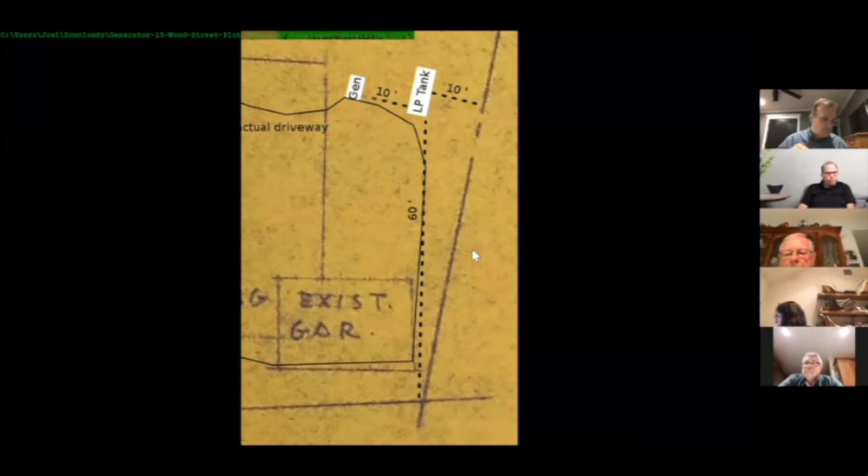Having a little bit of trouble switching between photos while it's shared. I'm okay, not sure if you need to. Let me find the right one and I'll share it again, the one I was talking about.

We're very close, we talk all the time. 17 Wood Street looks like it's completely far away, but in fact the driveway at one point snakes by, and that's why I measured whether they'll be able to see it from the driveway. I just don't see how they'll be able to see it even - look, they're half a mile away. When they're home, of course they're not going to see it.

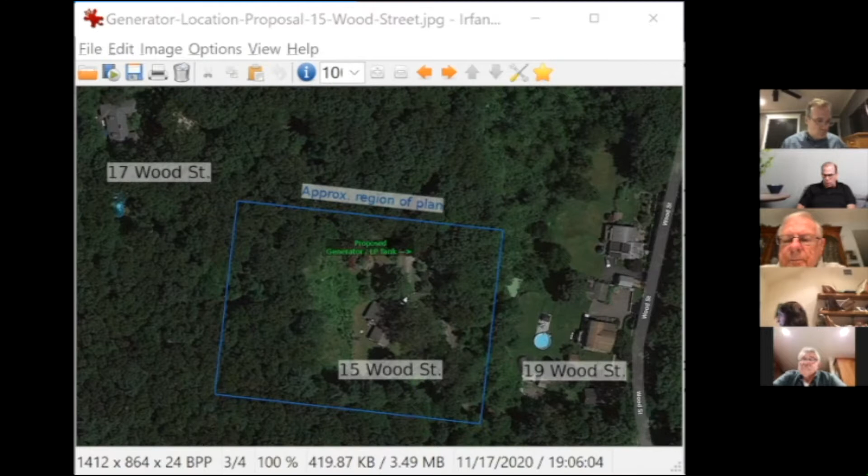And just in terms of location, can you see the new shot? Yes. This is sort of on my property, the generator and the LP tank. It's a little bit off, I didn't get it exactly right. The driveway is not just the black part - you can see there were leaves when I took this photo. The generator is actually a little bit further to the left.

But the point is that's the radius that can be refueled during the winter with the refueling truck. The reason I can't put it way further to the left next to the house is that it exceeds the range of the hose for refilling the LP tank, unless I'm successfully able to clear much more of the driveway than I normally am during the winter.

Now I do have a question for you. If I remember correctly, because I used to be in that neck of the woods, your driveway is relatively steep slope? Yeah, if you look at the part on the screen, you can see there's a part before it forks. The fork is a fairly steep slope, yeah.

Okay, but where the turn is, does it still have some grade to it, up to where the cars park? The turn, it does have some grade, it's not as steep as the other part. It's currently not blacktopped - I forget the rationale for that, but the driveway person, when I bought the house in foreclosure, did a lot of work on it.

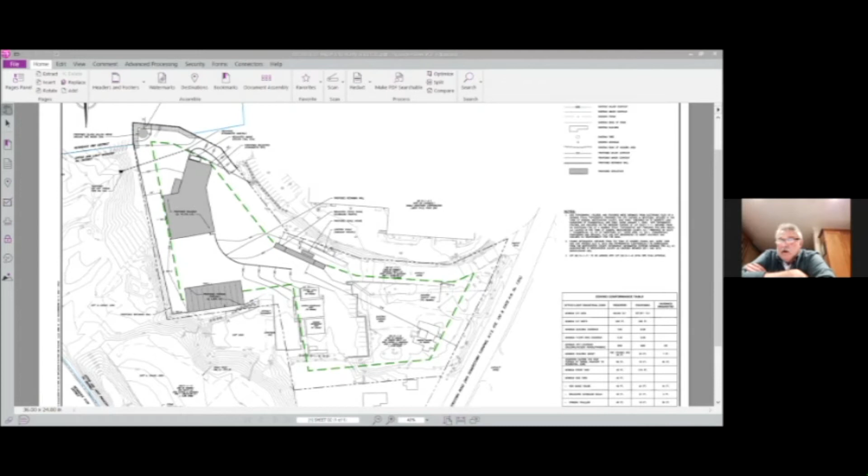Now, I may be asking this prematurely — with the new configuration of the scales, I've been there numerous times, and depending on the time of day, there's a line all the way out to Route 100. Is this going to alleviate some of that traffic, in the sense of two scales, or if I read it correctly, can you have two scales? Because one I understood was for commercial purposes for yourselves, and the other was for the general public and the normal carters coming in and out. Is there going to be two scales, so this way people can get off of Route 100 easier?

There are two scales. There will be two scales. This existing scale, if you can see my cursor, will be the inbound scale, so all vehicles coming in will cross this inbound. This scale will be the outbound scale. There's an existing scale approximately right here that's outbound, but we're also going to be installing a scale in the tunnel here, where the tractor trailers will be weighed as they're loaded.

So when they're being loaded, they'll be weighed. When they meet their weight, they'll be taken out and either parked in the pavilion or taken off site to their destination, whether it's a disposal or recycling facility. So they won't be crossing the scale again — that should help alleviate some of the traffic you've experienced.

Now, I'll say I'm a little confused, because right now there are two separate scales existing. Correct — one was for their own use, and one for the general public and the carters. I believe they're both scales today. As with the plan we have, one scale is for inbound and the other for outbound. So that's not the way they've ever been used, right? Anytime I've been there, it's the same scale, inbound and outbound, rotating one car inbound, one car outbound — that's what creates the backup Arnie's mentioning.

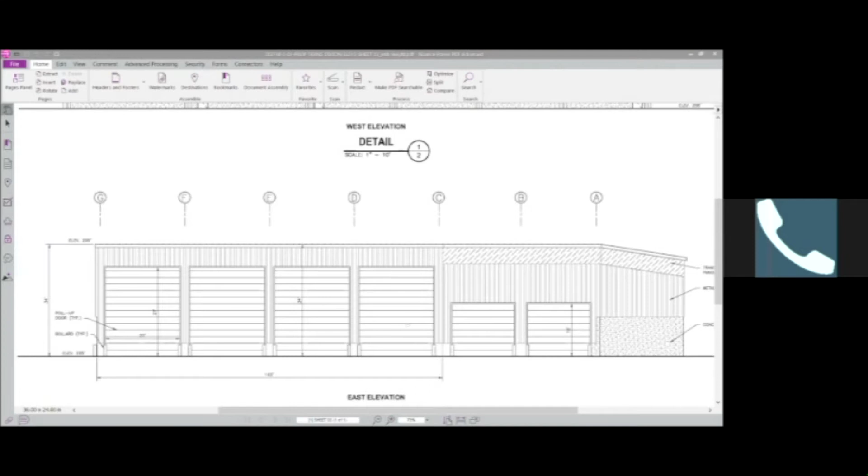Okay, so this is the front of the transfer station. Four large doors for commercial vehicles, and two smaller doors on the east end, on the part of the building that juts off at an angle, will be for customers, mom and pops. So we have a roof elevation in the front of the building at 299 feet above sea level.

The ground surface there is 265, hence the 34-foot elevation. But in reading your code multiple times today, it talks about ground surface elevations, and it wasn't quite clear if it was the average ground surface, the mean ground surface around the entire building, or the highest wall it talks about.

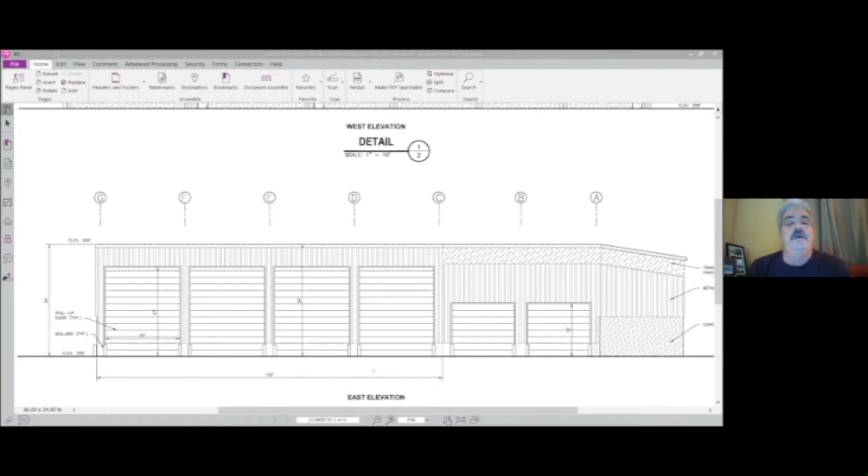So the highest wall is on the south side of the building, which faces the parking pavilion. We've got a mean roof elevation with a 4% slope — the high point of the roof is in the front and it slopes towards the back. So we have a mean roof elevation of 297 feet. The ground surface on this side and around the back of the building is 258 feet. That would give us a roof height at the mean of 39 feet, so our variance request would have to be for 9 feet.

So then the other thing we looked at was the mean ground surface. The mean ground surface elevation around the entire building is right around 260 feet. So if you look at that, we're looking at a variance of about 7 feet, for 297 to 260. So I think what we're looking for on a height elevation is, for the highest wall, a 9-foot variance. Apologize for not getting that straight a couple weeks ago when we made the submittal, but we want to get it right before we move forward.

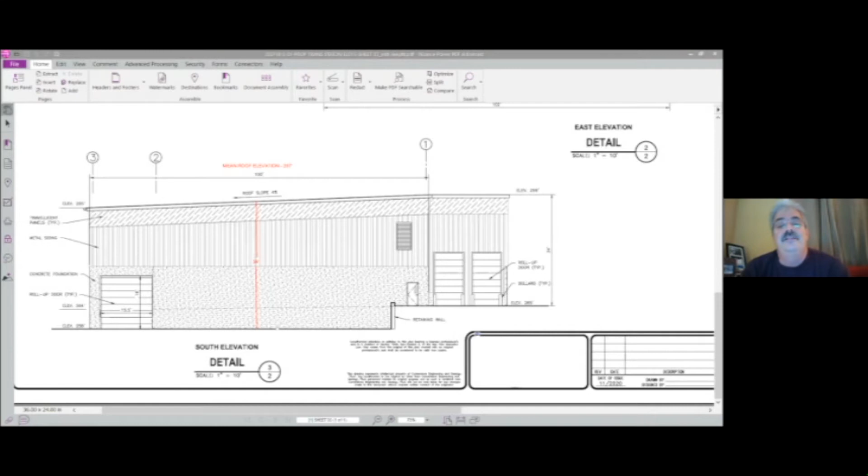Tom, what is your opinion on what height variance should be requested here based on the various elevations around the building? I would say take the mean height of the average grade around the entire perimeter of the building, not the highest point of the roof. Okay, so where's that going to put us as far as the variance they should be requesting here? About 7 feet, right?

I do have a question on the elevation. I'm looking at the proposed transfer station elevation page, sheet 3. At the highest point, the ground elevation is 258. The applicant mentioned a different height. The elevation of the ground surface at the front of the building on the east side is 265 feet. The ground surface elevation on the south and west sides is 258 feet. Okay, that's the side I'm looking at. I thought I heard a different number. Never mind, that's fine.

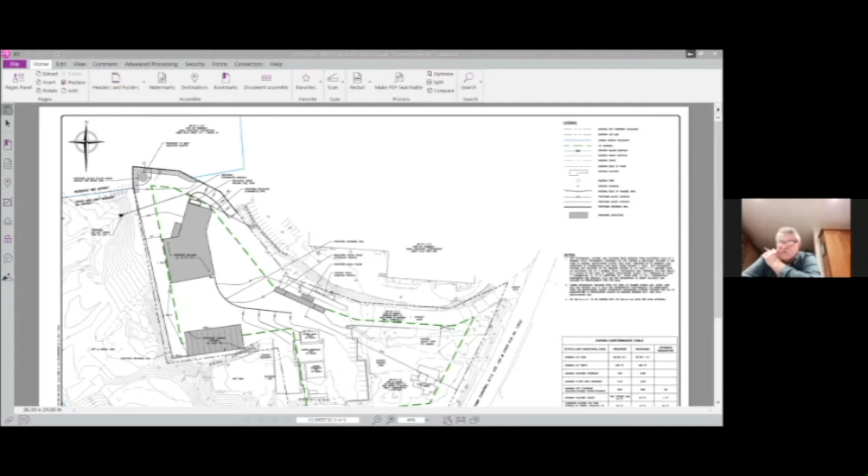If I may interrupt for a second, what is the water tank used for? That will be for fire suppression. Yeah, I did notice that tank, if I'm reading it right, that says 50,000 gallons. That's a pretty big tank. It is a big tank, but based on the size of the building and the material handled in it, that's what the building code requires.

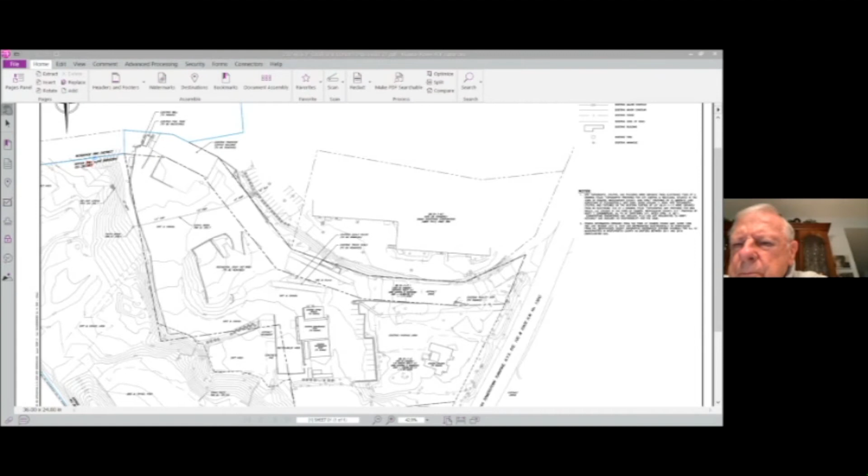Okay. So here, can you see the screen now? Yep. So this is the existing conditions, this is what's there now. Here's the two scales, here's the entrance coming in. This is the existing transfer building - its back wall is literally on the property line.

This is the other entrance in the back. This is the entrance in the front that I mentioned. The trailers are parked right here. It's open air, but it's a containment structure. There's a leachate collection, so any water that falls on this area or gets into any of these loaded trailers is collected and stored in a double-walled underground tank and pumped out as needed.

So there's already activities literally on the property line, and what we're asking for is a variance from the buffer. We will put a 10-foot buffer and plant it with evergreens and the like to help as a barrier. But there's just no way to move 50 feet off and then have the setback from that.

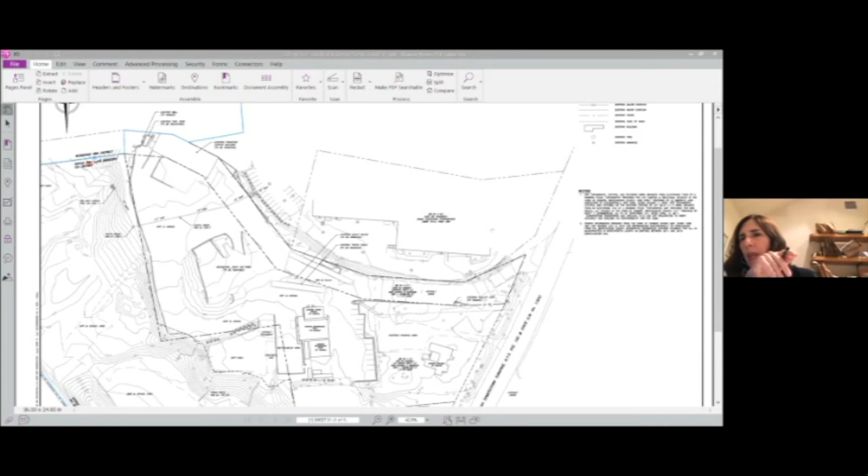No, so I didn't - let me just clarify. One, they're aware of it, and my understanding is they don't have any objection. But just so you know, right now our enclosure is on their line. So now we've actually created a buffer, and we'll put trees, and we will confer with them about the trees as well. But there'll be more of a buffer for them than they currently have on their property. That's great, and all I was asking for was a letter saying no objection.

Okay, we'll speak to them.

Question in regard to the tank in the northwest corner: how tall is that water tank? I'm trying to understand the size of the tank. I think it's about 20 feet tall.

Okay. And do you know what the diameter is of the tank? Not off the top of my head. Okay, this is the scale, so.

It looks like it's 10 feet wide. Yeah, about that, I guess. Yeah, up in your upper top corner. Yep, proposed 10 feet wide, if I'm reading it correctly. I don't think that's it.

Or is that the buffer? Oh, I'm sorry, it's a buffer. 10-foot buffer, take that back. Yep, 10-foot buffer. So the diameter is more than 10 feet. Probably 20, by 20.

It's 12 feet, it says. So that 12 feet is, the tank would be 12 feet from the property line, 2 feet from the buffer. That's why I'm saying maybe it's 20 feet wide tank and 20 feet high. It's about a 20 by 20 tank, give or take.

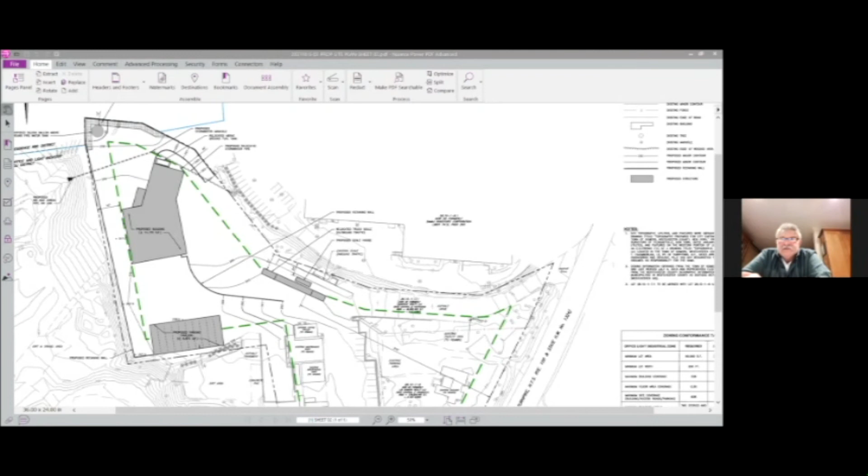Well, I think that's it, unless there's more questions. Yeah, okay, with the drainage, what are you gonna be doing for retention ponds? So there's an existing massive retention pond down here on lot 11 where stormwater is already directed, and what we're going to do is improve it.

The stormwater from the adjacent property upstream, Majestic, comes out at there's a head wall here and a pipe, and then another head wall right here. It's piped basically across here, I think it turns a little bit, and then it comes basically to the same area and discharges to this area on lot 11, which is a couple of isolated wetlands, and they end up working their way draining towards Plum Brook.

We are proposing to relocate that line around the building rather than have it underneath the building, and have it discharged at the same location. The stormwater from the site will all be sent towards this corner over here, and there's existing riprap swales that will probably need some improvement. But we're planning on using them, and the system hasn't been designed completely yet, but we'll probably have some sort of a small wide basin/swale across here to bring this stormwater this way.

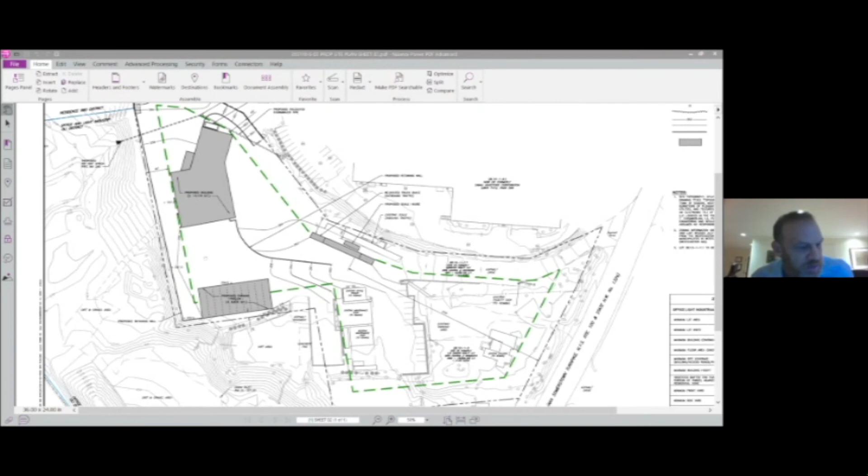And I would hate to just put more blacktop down if we didn't have to. I don't see why you can't just use a permeable paver. I don't see any reason. I don't think there's a big cost difference, and I don't understand it.

I believe they'd still be seeking the variance though, because our code defines site coverage in 170-3 as off-street parking and loading facilities, including access drives, whether paved or unpaved.

Yeah. Okay. And that was a question I had for you, Tom, whether gravel or pervious pavers or anything make a difference on site coverage. So it will not.

All right, 170, what was the site, Tom? It's 170-3 definitions, site coverage, and it's synonymous with lot coverage. So regardless of the surface, the variance would be the same.

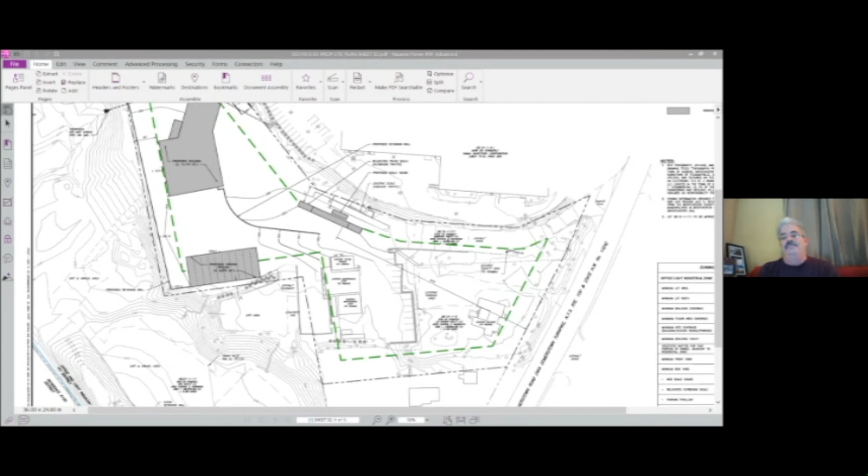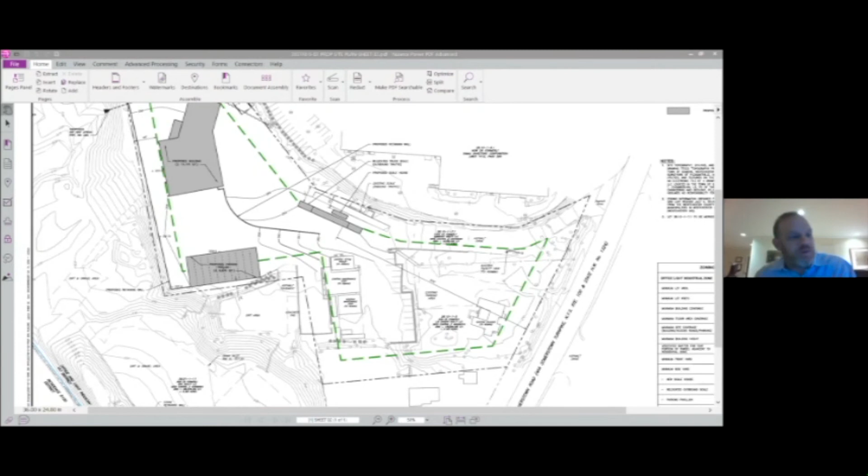Oh, you're saying with no change, you need the 9% variance. Correct, correct. But I think your suggestion is a good one, and I think we're willing to consider permeable pavers. So as we move to site plan, we'll incorporate that. That would solve my issues.

Thank you. One thing I'm looking at also is you do have a plan for proposed vehicle movement. Maybe you could put that up on screen for a minute? I can. Yep, let me get that.

Where is it? It seems to be color coded, with the red being the larger tractor trailers, and blue and green being residential vehicles and smaller commercial vehicles. Is that what we were talking about here?

I think so. I need to, yeah, sorry, you need to see it. I know, these are quite involved plans. Going through them, it took me some time to figure out what's going on here. Yeah, I didn't have that open, so I had to open it up.

Yeah, I think that was a plan that the planning board wanted us to include to show the movement of the vehicles.

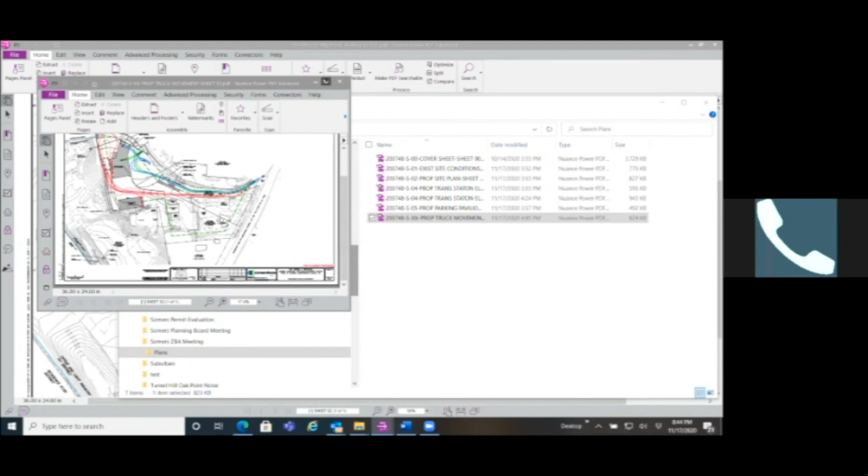Got it, but now, for whatever reason... and there you go, that's it. Okay, that was a fight.

There we go. So the red is the trailers, and this is what's called the tunnel. It's in the back of the transfer station, at a lower elevation than the tipping floor, which is up here. This shows that the trailers can pull back in, make this turn, and get into the building. That's why we need to use all this space, because they wouldn't be able to make that turn.

And then where do they exit the building? They exit right here. It's not shown, but they would come out here and either park the trailer and unhook it if it's just a yard horse, or if it's a tractor taking the trailer away, they'd just pull straight out and go.

And how do they get to the scale? They don't need to. There'll be a scale in the tunnel, so they'll be weighed there, and they have a tare weight for all their trailers. So they weigh them there, get the weight, and off they go. They don't have to go back across the scale.

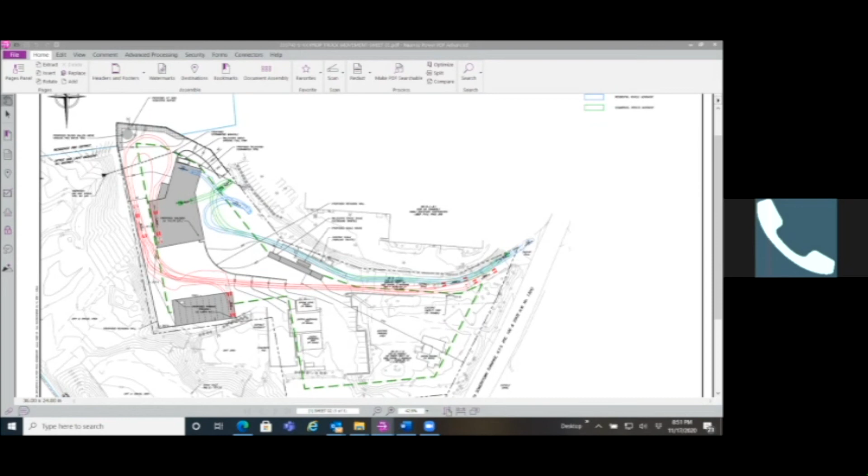Yeah, because the way I'm looking at this, with the little experience I have in construction, building this facility and the current facility now, they overlap, and where are people going to bring in construction debris and dump it, or do they have to go to a different facility?

At some point, they may have to shut down. We're working through how that operation will take place, but the plan is to continue to operate as long as possible during construction.

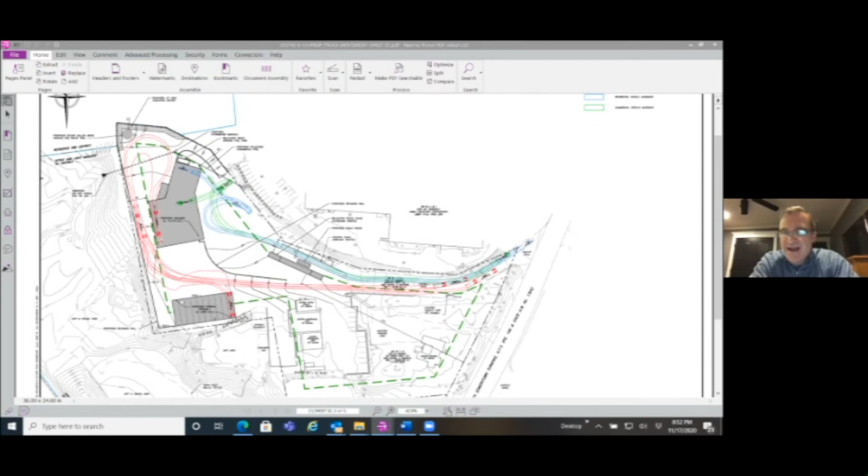Any other questions of the applicant at this point in time? Does the applicant have anything additional to say before I bring this out to the public? Any other comments or questions, issues? Not at this time. Okay.

So why don't we put this out to the public? Paul, if you could just open up the lines, or if there's anybody online with us now, anybody would like to call in regard to this application, we would like to hear from you. Is there anybody online with us right now who would like to speak in regard to this application? All right, and I have nobody on the YouTube side either. Okay.

I see an Angela and a Dominic online with us. Do they want to comment in regard to this application, or how are they associated with this application? Okay, not getting any response there. I know Angela is my associate, so I believe that's her. Okay, thank you. And how about Dominic? Is he related to this application at all? I have no comment at this time. Okay, okay, thank you.

Okay. And Paul, you don't have anybody calling in? Nobody who wishes to comment in regard to the application? No, I do not. Okay, we'll give it another couple of seconds here, then we're going to move on. Okay, I think we're going to move on then if nobody wishes to speak from the public.